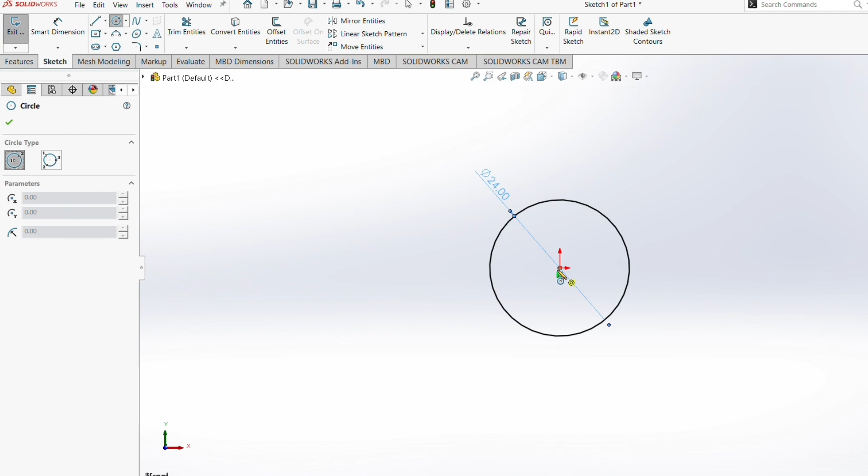Let's start the video. Select the front plane, sketch on it, select circle, draw a circle, give the dimension 24 mm. Draw a second circle, give the dimension as 30 mm.

Now draw a line like this. This is the central line which is vertical. Now draw a second horizontal line, a small line like this.

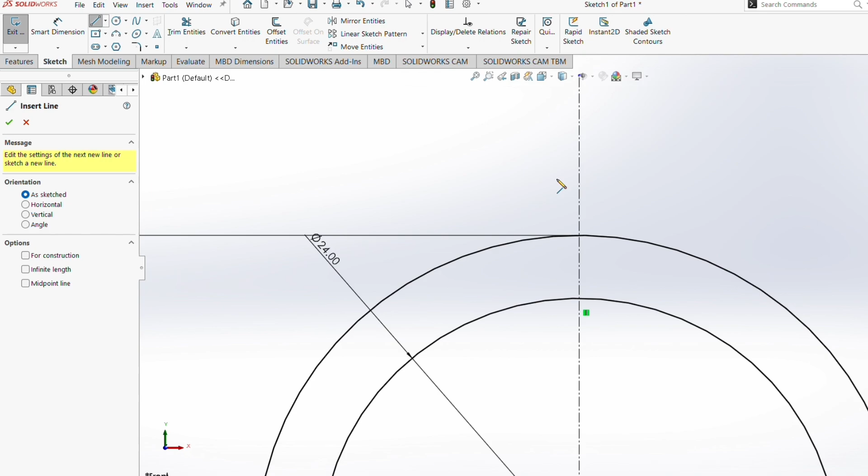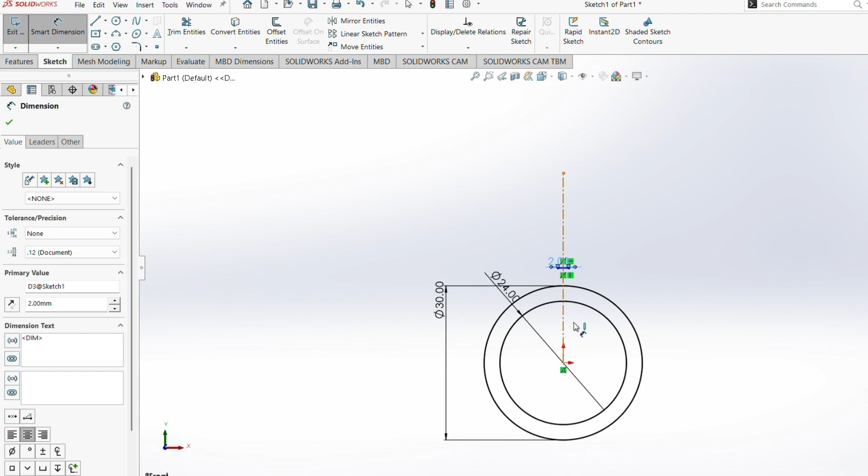Now select the midpoint of the horizontal line and this vertical center line and make as midpoint. Now give the dimension to this line as 2 mm, and we will fix this line from the center. We will give the dimension of this line from the center as 20 mm like this.

Select 3-point arc and draw like this, first to the point and second to the circumference on circle, and draw like this. Now we will make a mirror of this arc. Select the arc and mirror about this central line.

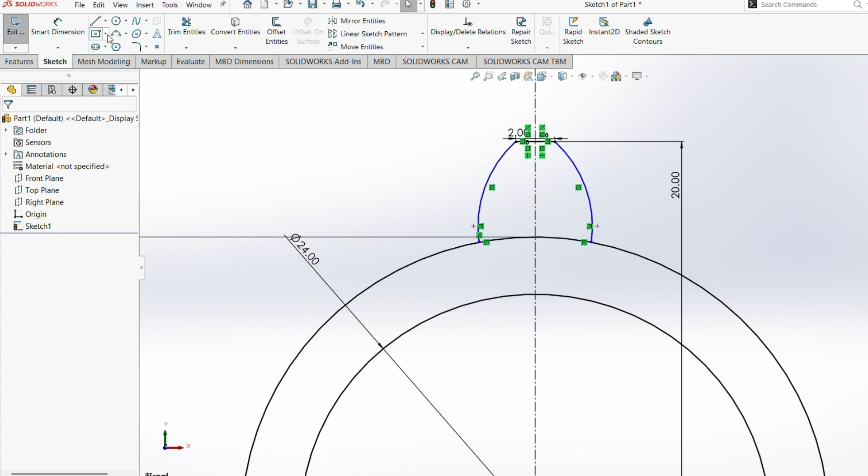This will make a teeth of our gear. Now we have to fix. Give the dimension of that point as 5.73.

Now it is fixed. So we have to give round of teeth, so we will make a circular sketch pattern. Click on the circular sketch pattern.

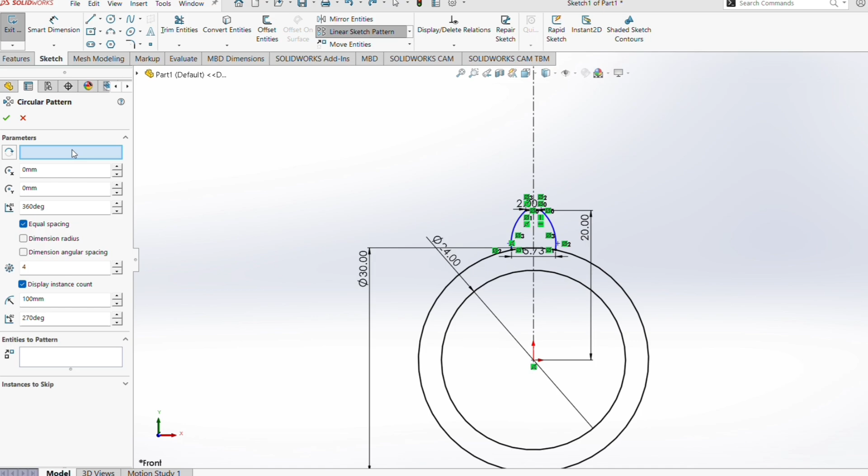Now select this part to be circulated around the circle. Now we will make 12 teeth. Give the number 12 and click on the right.

So our next step is to trim this part which is incomplete. So trim it. Now we have completed the trim part.

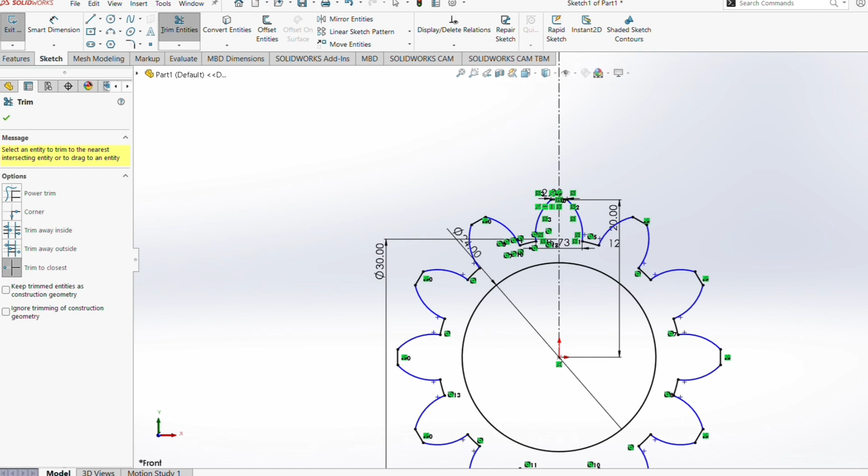We have given dimensions. We have one incomplete dimension. Give the dimension to the arc as 10 millimeters.

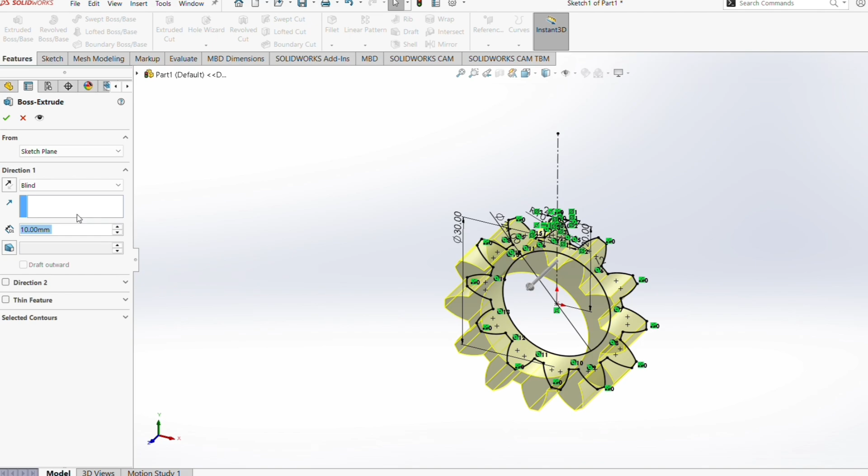Now this is the fully defined sketch. We have to extrude it. Click on the feature tab, click on extrude. Select the mid plane and extrude by 10 mm, then click on the right.